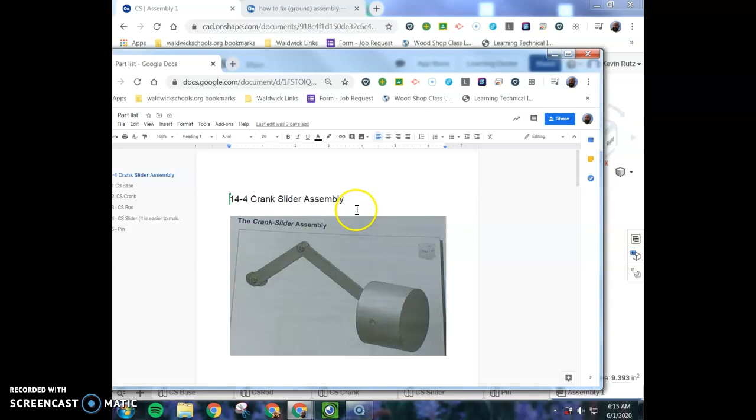Hey, today we are going to start the assembly and animation of the crank slider assembly. In the end, it should look like this.

Now, before you get started, I want you to realize that before we can animate with degrees of freedom, we need to assemble this crank slider.

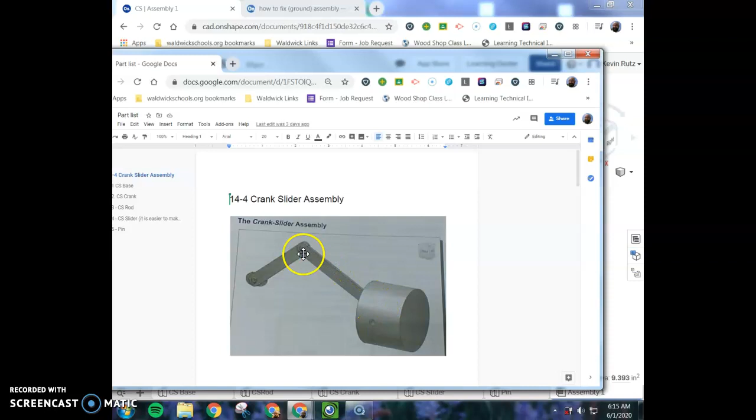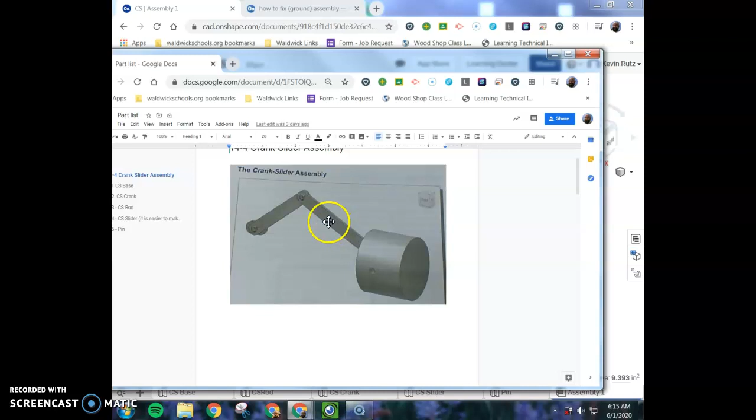So you'll see we have all our different parts laid out. You have the base, you have the rod? No, the rod is this one. Let's see, there we go. I named all my parts.

So we have the base, we have the crank, we have the rod, we have the slider, and then they're fixed together with pins. The crank is connected to the base with one pin, the crank is connected to the rod with another pin, and the rod is connected to the slider with two pins, one on each side.

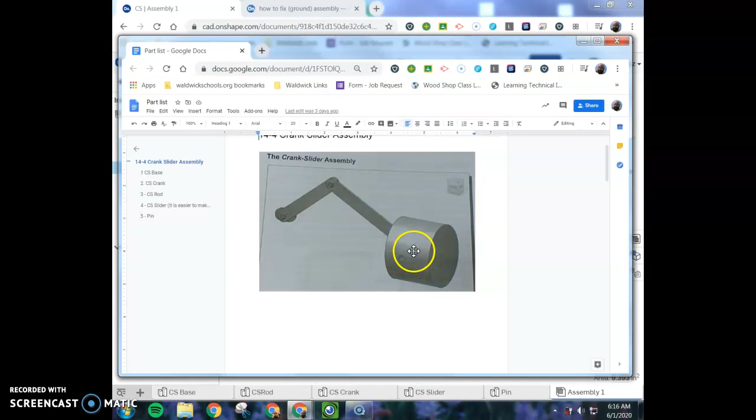So, to do this, I go into my assembly document and I lay out all the parts I need. I've got 4 pins for all the different components that we are going to assemble together.

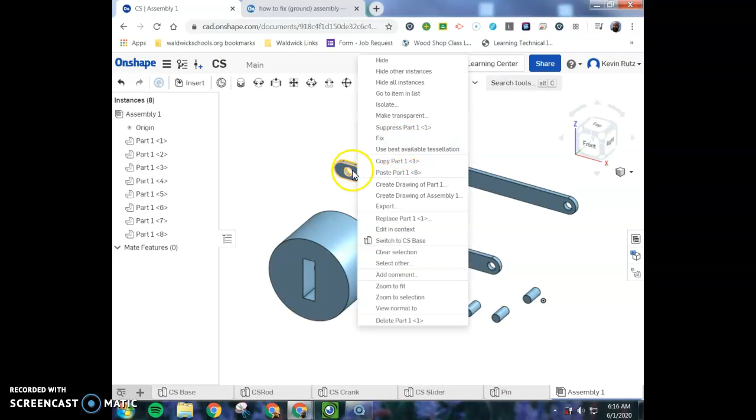Now the first thing we need to do is ground the base. Unlike Inventor, to ground this you have to right click it and click Fix. That's going to fix it to the virtual space.

With this part, if you want to just move things around so you can see it better, the Transform button is your friend, and that's that square that shows up.

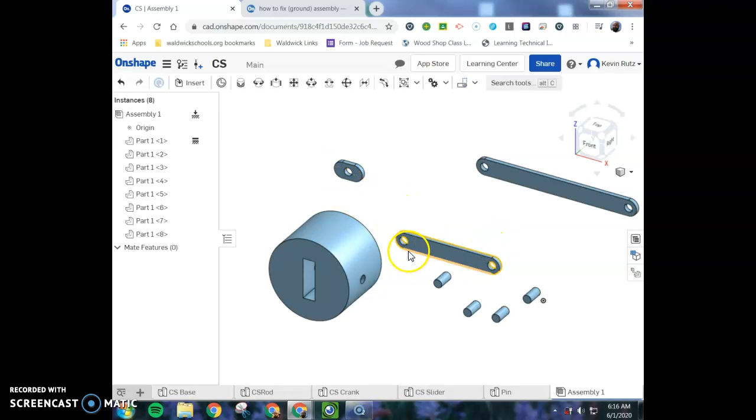So now we go into the point of assembling. Reference that picture, because, let's see, the base is in the back, and then every piece kind of comes forward to the foreground bit by bit.

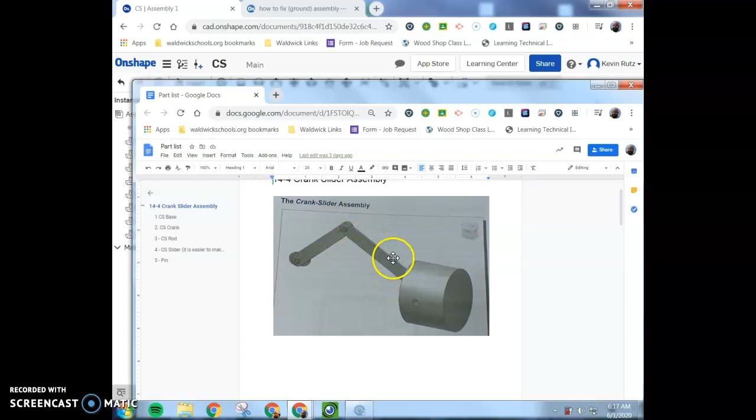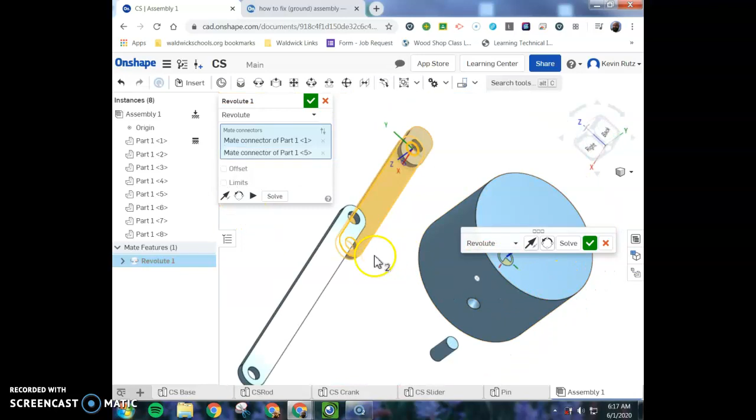So I'm going to use revolute mates because that allows you to spin the components. I'm going to attach this to, let's see, the back of this. And now these things are stuck with each other. We say OK.

And now I'm also going to include this pin. So once again, revolute mate, this to the very front of that front pin. Say OK, and it should look like this.

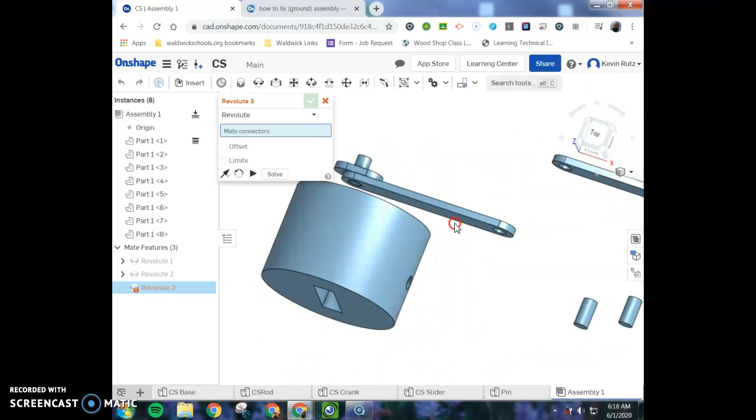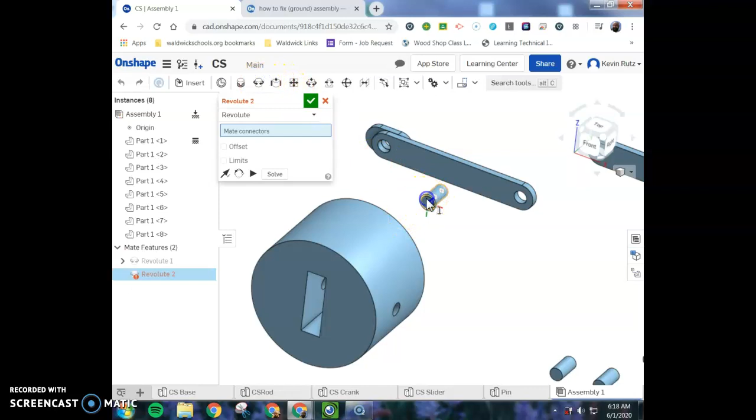Actually, I lied. I don't like this. So let's offset it a little bit. Let's try 0.25. Nope. Let's undo. Okay, I'm going to do this revolute mate from here to front here.

And now I'm going to offset it. The distance, if it's 1 inch, and each of those is a quarter, so it's going to be a quarter inch.

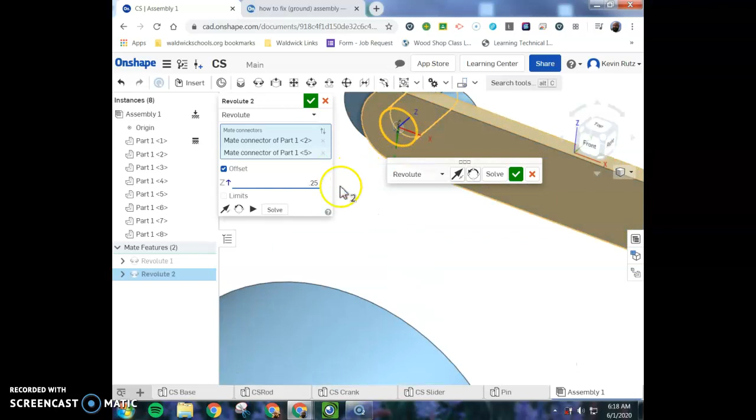And that's telling me it's going the other direction. I'm going to flip the primary axis. No, I'm not. Let's go negative 0.125. Okay, so I put in negative 0.125, and that has put the pin exactly in the center where I need it.

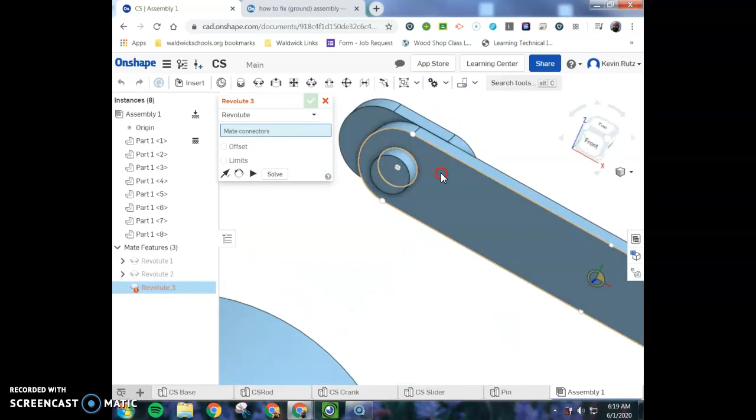I'm going to continue this process with the other components. Before I do that, though, I think it's handy that we can actually click and drag the parts that we want to have spinning around to just see that it's replicating the movement that we want.

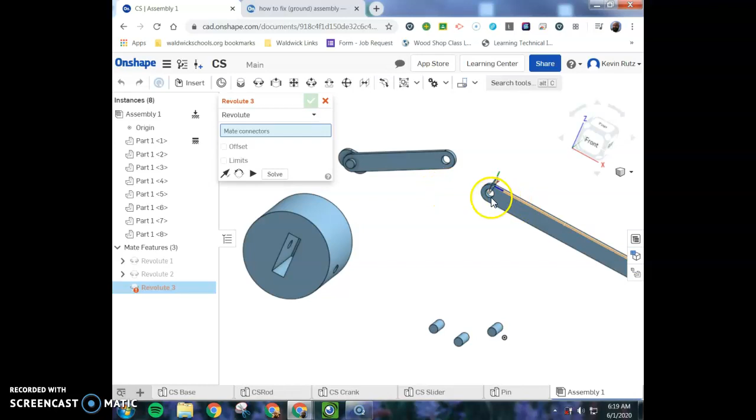Once again, revolute mate. I'm going to pick the front of this. Yeah, that's fine. And the back of this. That's good, looking like what I want. Here it spins. Here it spins.

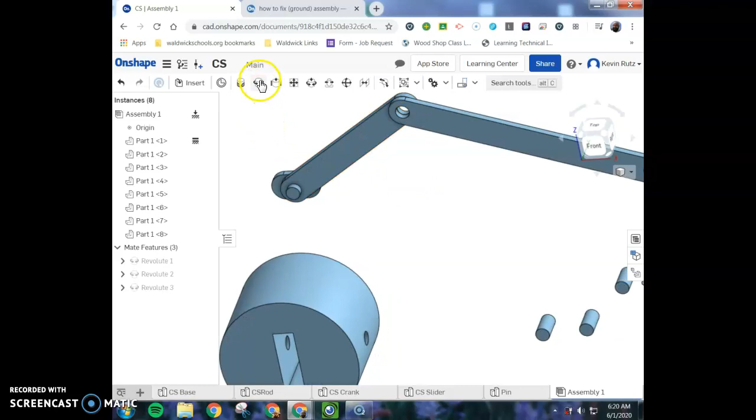Very good. And now I'm going to get that pin in there. And as I've learned, we pick that front, there we go, with an offset of negative 0.25. And I say enter.

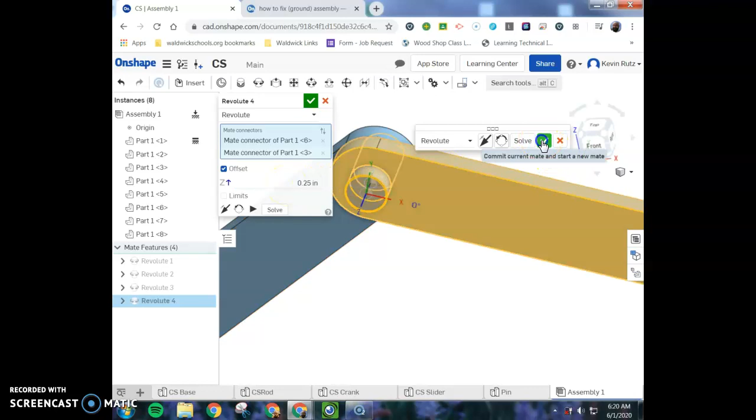That one doesn't work the way I want. Alright, so I guess you just got to pick. You got to look at the preview and see whether or not you want it to be one way or the other. Now this one's going to be funky, like James Brown.

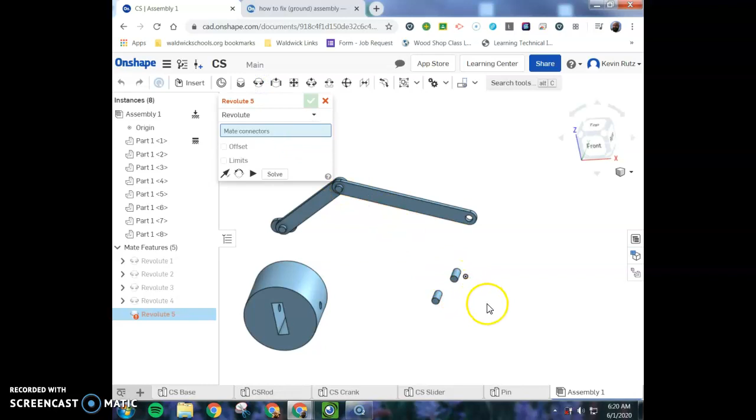So here's what I'm going to recommend here. Let's get that revolute mate. And we are going to set up this pin with this side.

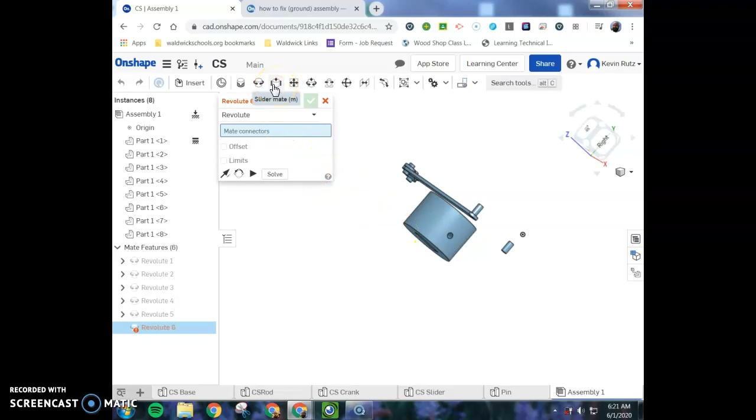And let's see. Really, I think it should be 2 pins, but I'm just following the book here. I'll do another one like this, and I'm going to set this up to align with that inside edge. So it's actually not even. I'm sure you could figure that out. Just 0.1, I could do that. Let me not be lazy. It's going to be half the distance.

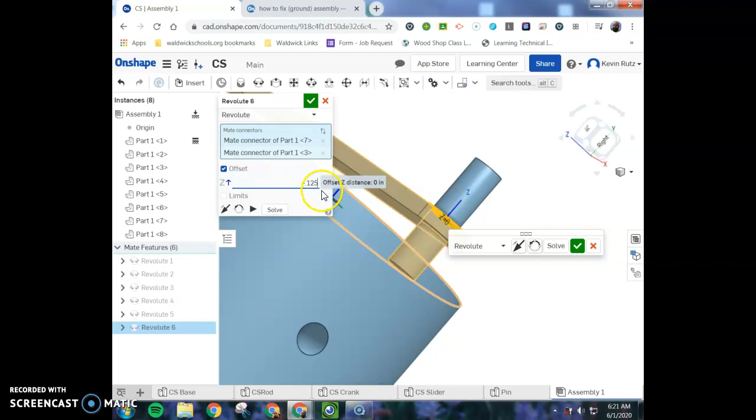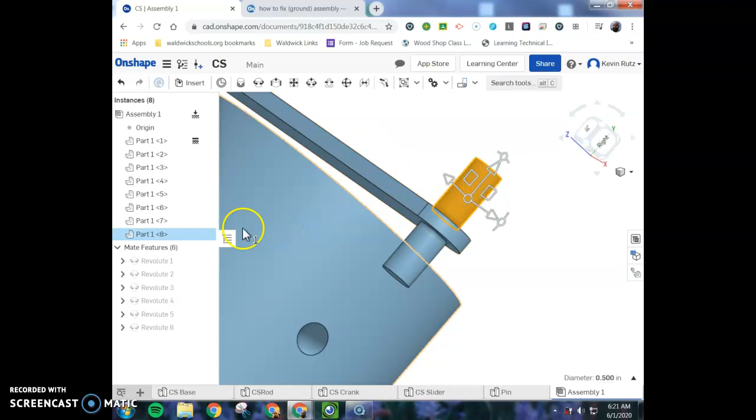Okay. And then this one, I'm going to go back and I'm going to edit. Let's see. Yeah, double click the component. Yeah, maybe not. Okay, double click the revolute. This is going to let me go back into it, and I'm going to just set it up with that -0.125. And that's the wrong way, so I'm going to just edit it. Go back into that revolute. 0.125.

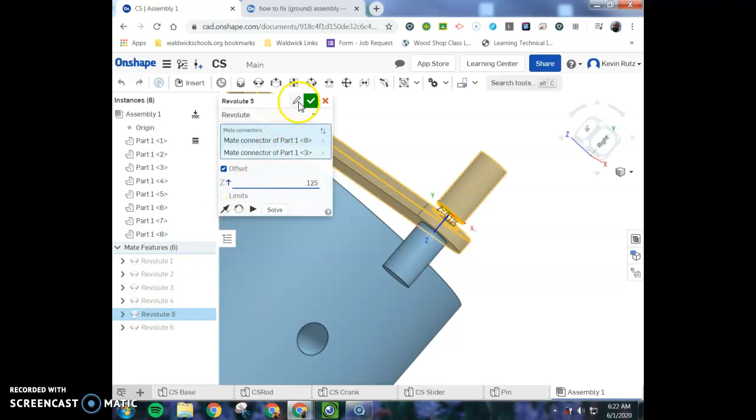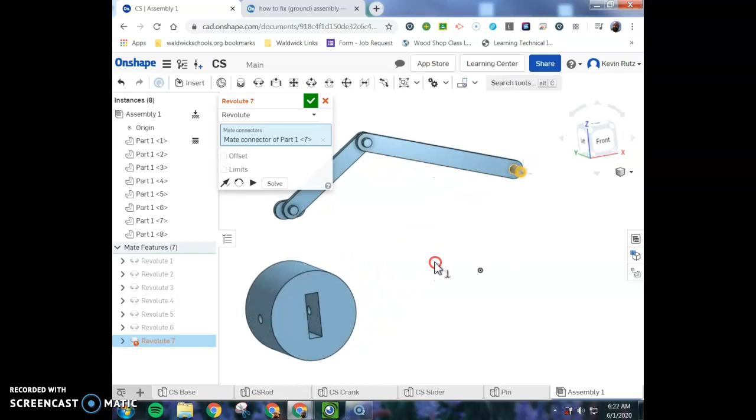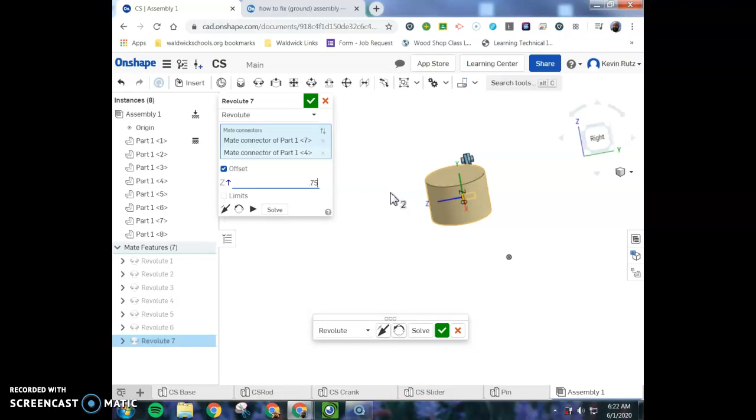Alright, nearly there. Last task is to get these pieces pinned into the slider. So, what I'm going to do is another revolute. And let's see, I'm going to turn this so I can see that inside hole. That's going to line up. Okay. Now, I'm going to offset it. Let's see, if it's 1 inch long, let's go 0.75.

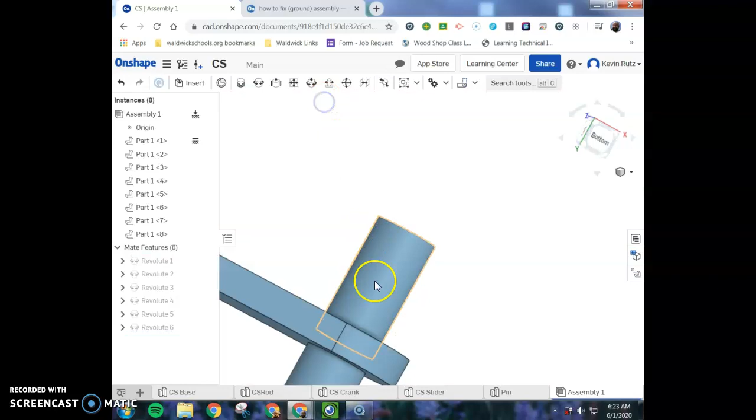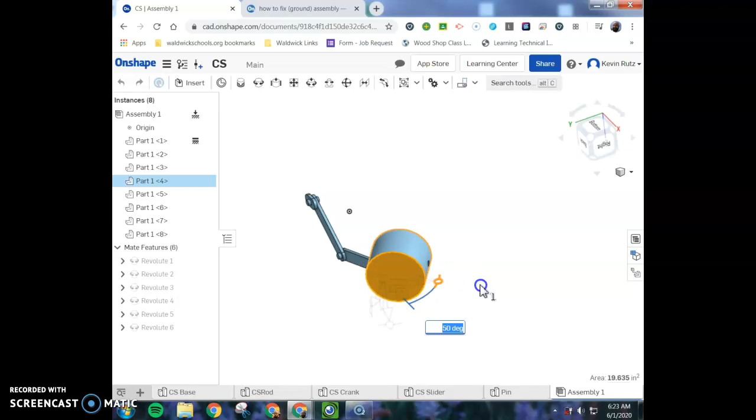And now I highly recommend changing your rotation so you can see what it looks like. That's not exactly what we want. Oh, that's because it's not angled the correct way. Okay. So let's see if I could just rotate this. Okay, I'm going to choose this. Once I release, I can type in 90, so it's lined up the way I want it. I'm going to then transform it, get it to move in the direction I want.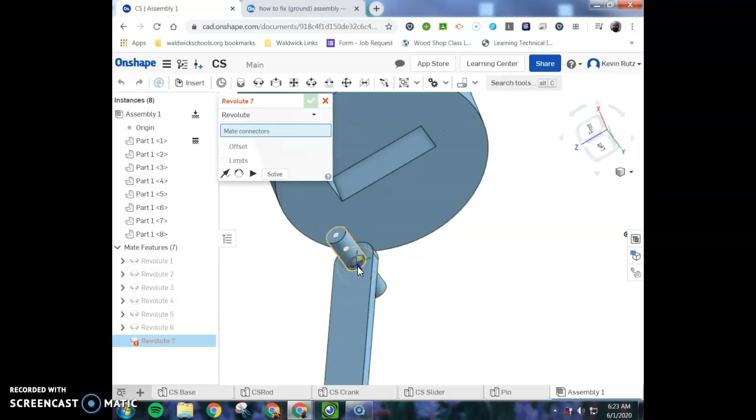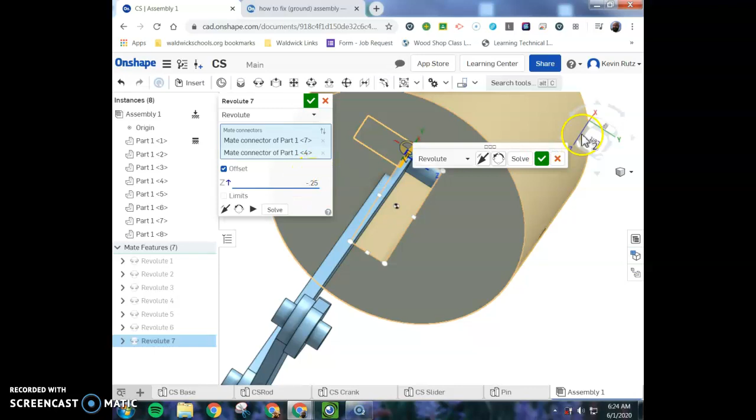Very good. And now, let's see, revolute. I'm actually going to revolve from here into this hole. That's going to set me up with one side. So here it's just a little too close. So now I'm going to offset it depending on how I want it. So let's try that negative. Let's try that 0.25. I think it's negative. Nope.

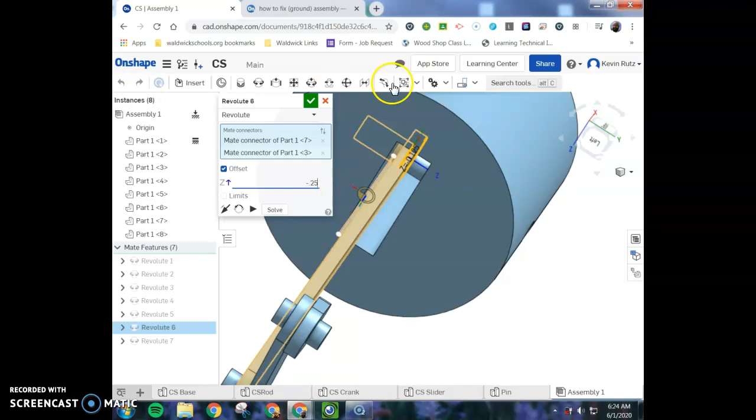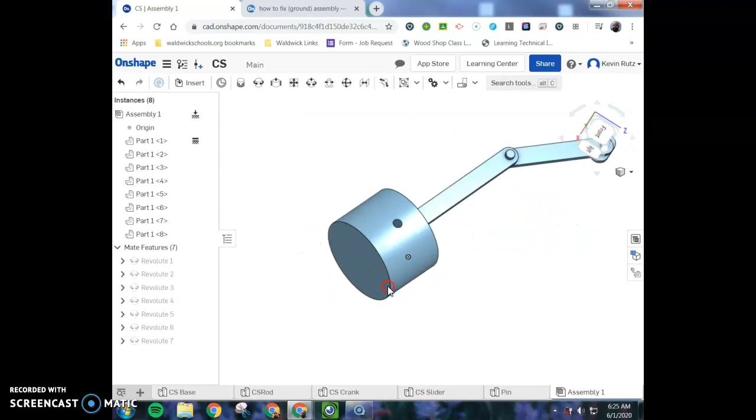I still don't like it. So I think it's going to be 0.25 and, oh, wait, maybe it is negative 0.25. Yep, 1/4 inch. So now it's got it centered, and honestly, you don't need to fasten the other side because it's going to be locked on that pivot. So at this point, you should have, oh, there we go. Well, it looks like I set up all my things opposite. It still works the same way.

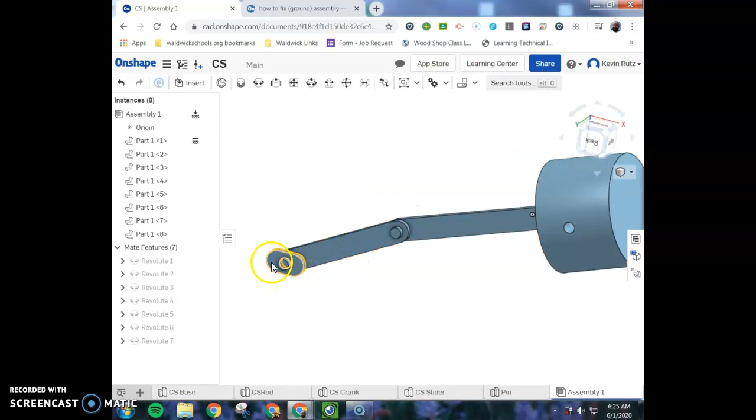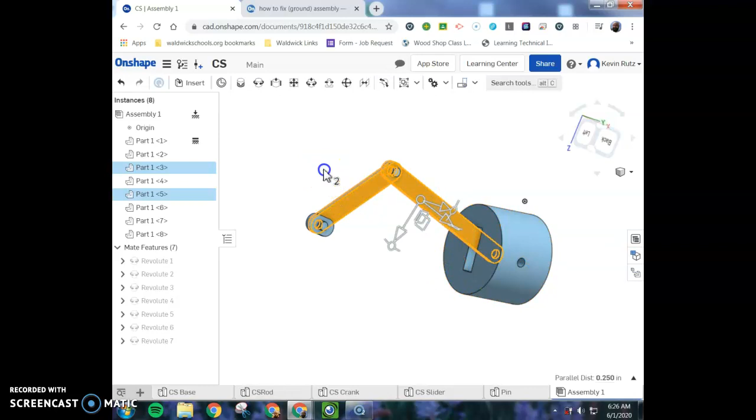So basically, rather than have this pin sticking out in, oh boy, I haven't had my coffee yet. So here we go. The base is grounded, I can rotate this to get some movement. I can rotate this to get some movement. And I can rotate this freely. We're going to set constraints so that items only move the way that we want. This one's going to need linear motion. All these will need not linear, revolute, revolution, what do you call it, animations.

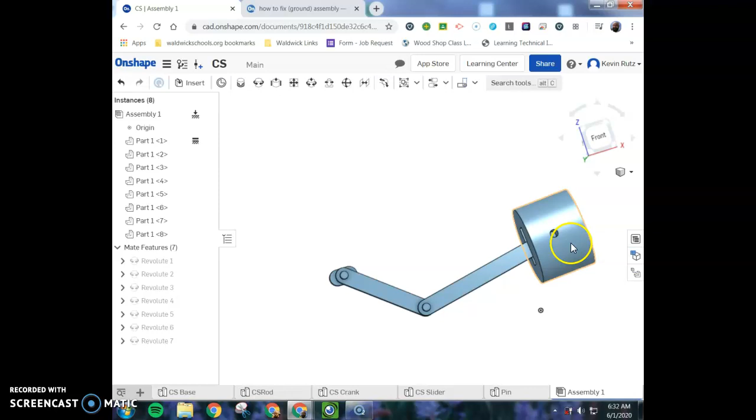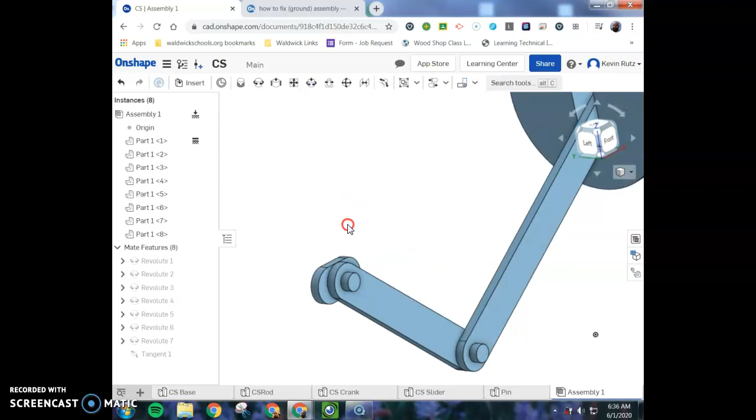Now, to also support the motion that we're trying to get, we don't want this thing freely spinning. So we have to figure out some sort of way to make this slide back and forth only. To do that, I had some success with one type of mate. I used the tangent mate on the front edge, the curve. That's going to be tangent to the bottom. And now, when I pull this, did I hit the right one? There we go. It has achieved a linear motion in the direction I want.

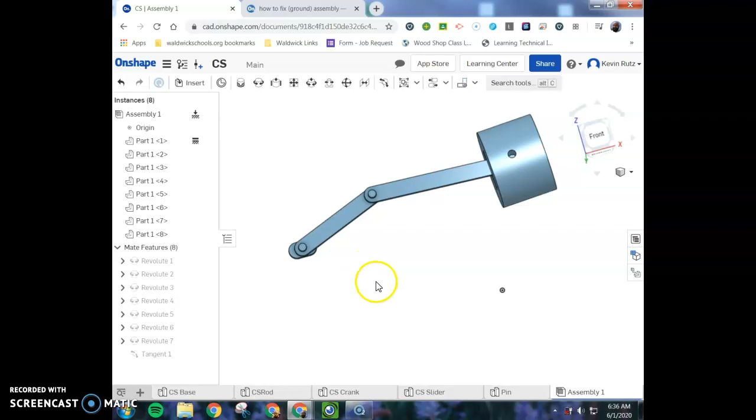Now, it isn't perfect. Ideally, you would want this piston cap to be centered to the same height, and you could probably create objects for that, but this is sufficient for what we're doing.